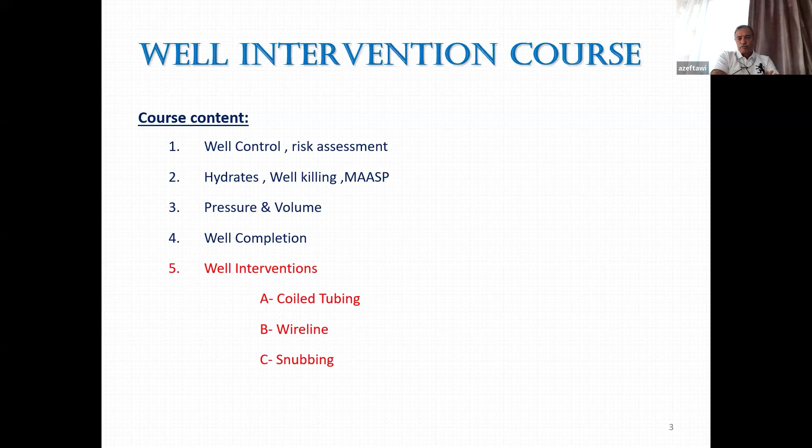If you see this picture, that's why we say, why intervention? Why the intervention is we need to avoid seeing this picture, because the impact of this picture is life loss, definitely environmental loss,

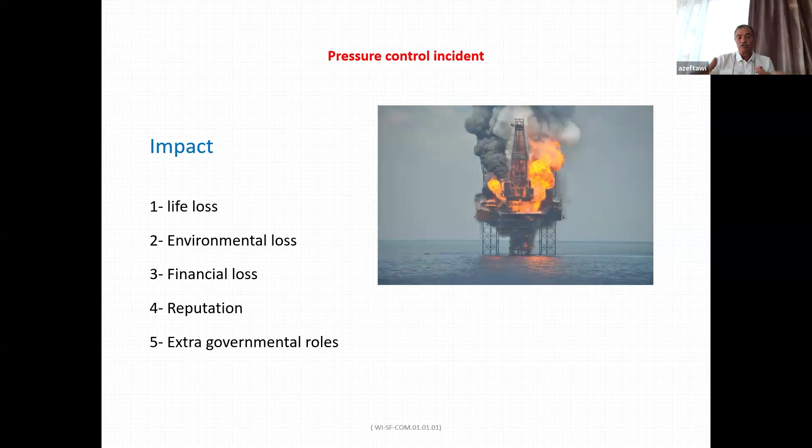financial loss, reputation. And number five, we call it extra governmental regulation, which means that whenever something wrong happens, we start putting new rules. To a limit that these days I cannot take a bottle of water with me to the plane. To go to the airport, sometimes I go 4 hours before the plane, and I have to pass by maybe 5, 6, 10 checkpoints before I reach there. This makes my life miserable. This is what we call extra governmental regulation.

When we go to the field, we care about what we call well integrity. What's well integrity? It is defined as per the NORSOK standard as the application of, it's a mixture of three things, as you notice: technical, operational, and organizational solution to reduce the risk of uncontrolled release of hydrocarbons. This is all what we care about.

I mean, how to deal with pressure, because hydrocarbons are deep, 10,000, 20,000, and more deep in the earth, and it comes all the way to the surface with pressure. It's very important to know how to deal with this pressure because pressure is a killer, as simple as that. Yeah.

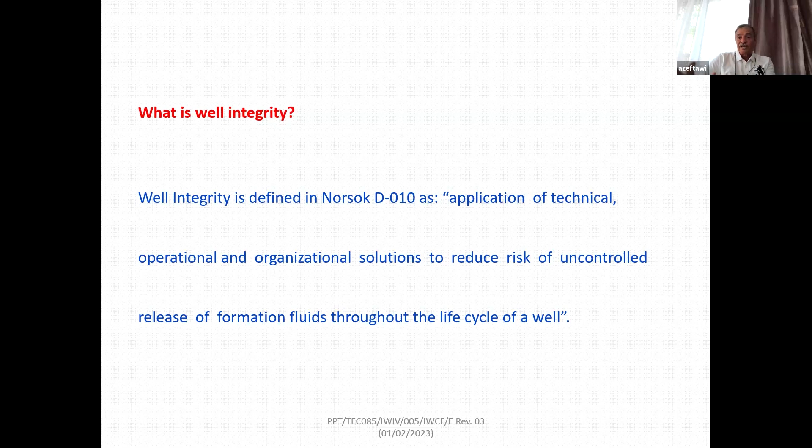And that's why when we are on rig sites, whether onshore or offshore, we do what we call simulating drills. What is drills? It is a simulation where we try to say, guys, tomorrow at 2 o'clock afternoon, we will have a problem. So tomorrow at 2 o'clock, there will be a bell that sounds in the rig site. And when you hear this bell, each one of you guys has to secure the job he is doing. Then go to the muster point.

Then tomorrow, when we come at 2 o'clock, when people hear the bell, everyone secures his job, and then goes to the muster point. Then the safety engineer will go to muster point number two. He's supposed to have 10 people. He will look at the list and he will start saying names, and then they will discover that Alex is not there. So where is Alex? Then we start searching for Alex. Then Alex, we found him in muster point number three.

Why, Alex, you went to muster point number three? He said, well, I was at the toilet, and when the bell sounded, I found that muster point number three is nearer than muster point number two. Then we tell him, please, Alex, we will have another one Tuesday at 5 o'clock afternoon. When you hear the bell, wherever you are, please go to muster point number two, which is your muster point. How to secure the job? This is a philosophy, or as per the design.

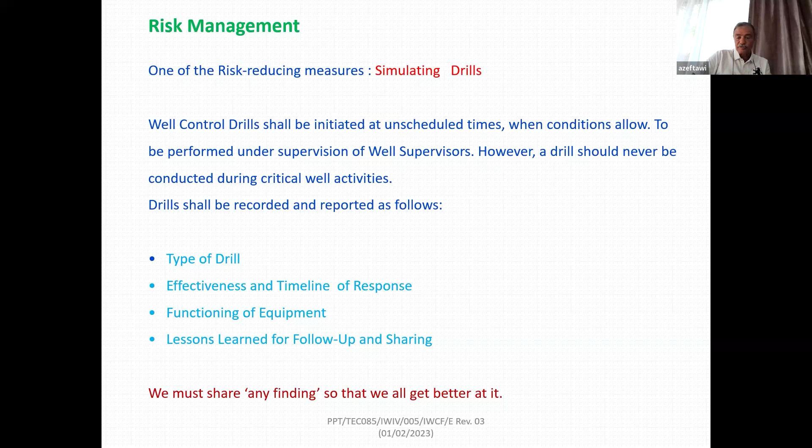To be able to answer this question, we have to understand or ask ourselves: the gas behavior from deep in the well all the way to the surface depends on whether the well is flowing or shut in. And when we talk about the gas behavior, we mean its volume and its pressure.

If the well is shut in, the gas bubbles traveling from deep in the well all the way to the surface cannot expand, cannot increase in volume, because it is a confined space. The well is shut in. So what happens is, in a shut-in well, the volume does not increase, but the pressure does. Because these gas bubbles cannot increase in volume, they travel upward with their pressure all the way to the surface, creating what we call gas cap.

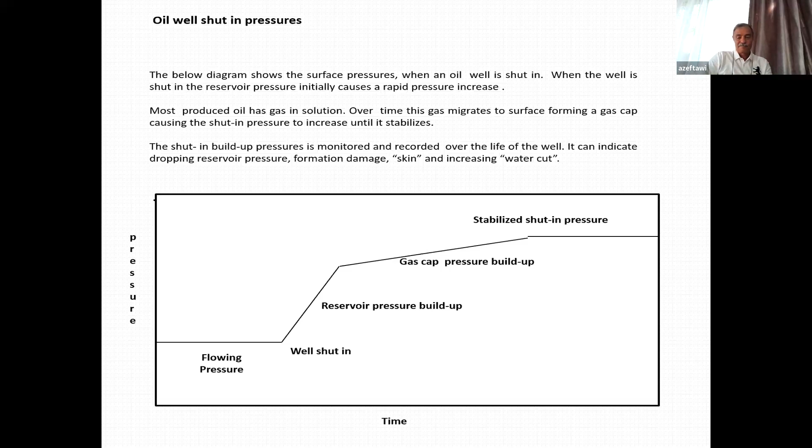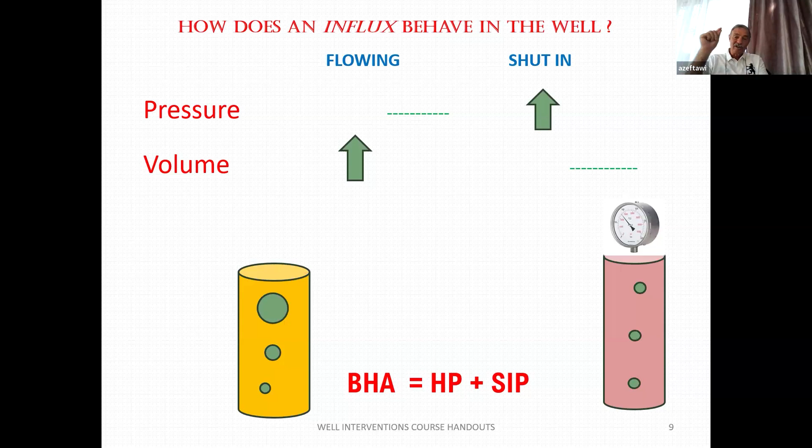I need to go back here. I just need to be sure that you understand this. In a flowing well, what's the gas behavior? Volume increases, pressure does not. The opposite if you shut in the well: volume does not increase because it's a confined space. Accordingly, the pressure increases.

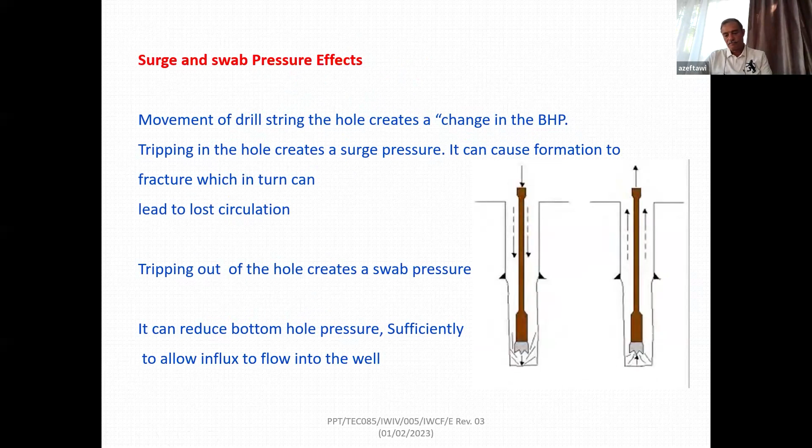One of the challenges we face in the oil field industry is what we call surge pressure and swab pressure. What is swab pressure? Swab pressure happens when you are pulling out of the hole with your tools and you don't have enough clearance between the ID of your tubing and the OD of your tools. If you don't have enough clearance, when you pull out of the hole fast, you are creating vacuum.

The same thing is the surge pressure. Surge pressure happens when you are running in the hole too fast and you don't have enough clearance between the ID of your tubing and the OD of your tools. When you do that, like injection, both injection and vacuum hurt your reservoir.

And that's why we say the word slow. The word slow in our routine life is a disadvantage, but in the oil field, this is the word you are looking for. When you run in the hole, slowly. When you pull out of the hole, slowly. When you are pressure testing, slowly and in stages. When you bleed off the pressure, slowly and in stages. Have you noticed that? Slowly is the word that attracts you to the good practice you should follow.

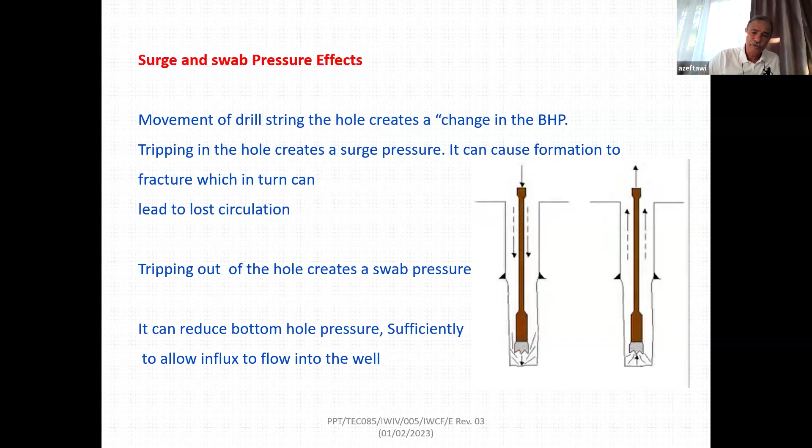Each additional single psi you add, number one, you are creating a hazard. Number two, you are creating fatigue to your equipment. That's why you have to minimize the hazard and minimize the fatigue you create to your pressure control equipment.

I know, guys, you might have so many questions to ask me, but this is the bad side of online courses, which I hate, because I'm talking most of the time, talking to the wall, I'd say. While in the practical courses, the normal courses, I'm with my attendees and we can fight all day. I like fighting a lot, in a sense of talking to each other and having different views. Then I try to convince you, and you try to convince me, and at the end we fight and go to the court, which is the API. I am missing this in online courses, that I keep talking and you keep listening. But unfortunately, this is how it goes.

Let's start with this topic, barrier. What is the barrier? What kind of well service disaster could happen caused by pressure? It is the blowout. The pressure causes a blowout.

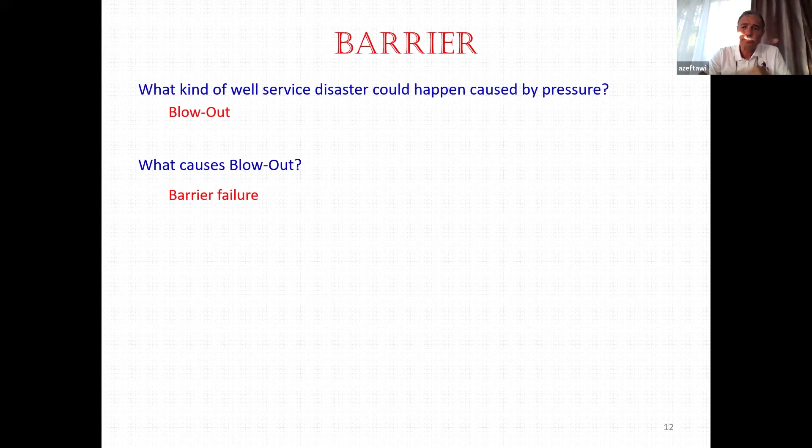What causes the blowout to happen? The barrier you are using failed to do its job. What is the barrier? By definition, it is any device, fluid, or substance that prevents the flow of a hydrocarbon.

Like what? Like the Christmas tree, like the BOP, blowout preventer, like a wireline plug we put in the completion landing nipple, like the stuffing box of the slickline, the grease injection head of the electric line or braided line, like the stripper in the coiled tubing.

Like the fluid. But when I say fluid, I cannot stop there. Fluid is considered a barrier if it creates hydrostatic head greater than formation pressure within a specific range, 200 to 300 psi, and it has to be monitored all the time. The moment you lose monitoring of this fluid, you cannot consider it as a barrier.

So for fluid to be a barrier: number one, it has to create hydrostatic head greater than formation pressure within a specific range, which we call 200 to 300 psi, and it has to be monitored all the time. Otherwise, it is not a barrier.

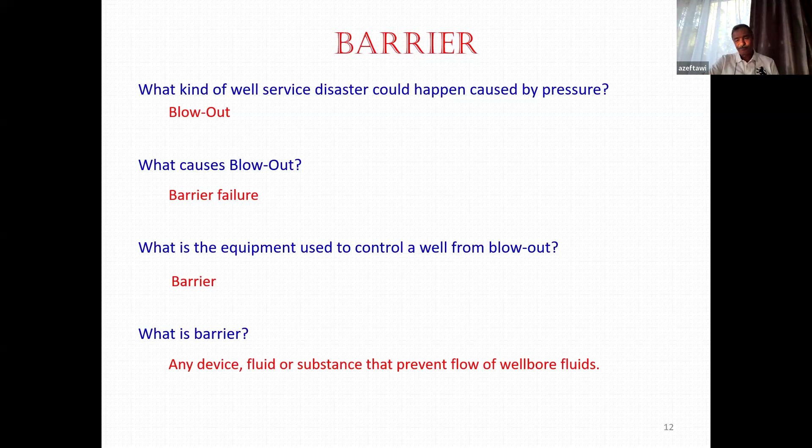We classify barriers into three categories: primary barrier, secondary barrier, and tertiary barrier. Normally, we are working using the primary barrier.

In slick line, for example, our primary barrier is the stuffing box. If it fails, we stop the operation and go to the secondary barrier. Why do we stop the operation? Because the only barrier that can work while running in and out, while in motion, is the primary barrier. All other barriers you can think of using, you have to stop the operation for. They work in static conditions, not flowing, not in motion. So if your primary fails, we stop the operation and apply our secondary barrier.

I know that one hour has gone so quickly, but let us see this question: what can happen when you unset a retrievable bridge plug and don't have enough weight above it?

The retrievable bridge plug is a wireline plug. We run it through the production tubing, go all the way down, pass the production tubing, go to the open hole. This retrievable bridge plug has a rubber element that inflates to seal around the casing.

We use it to do a certain job. Once we finish, we need to retrieve it out. Before you retrieve it, what is the first thing you should do? Equalize the pressure - keep this in mind for your future.

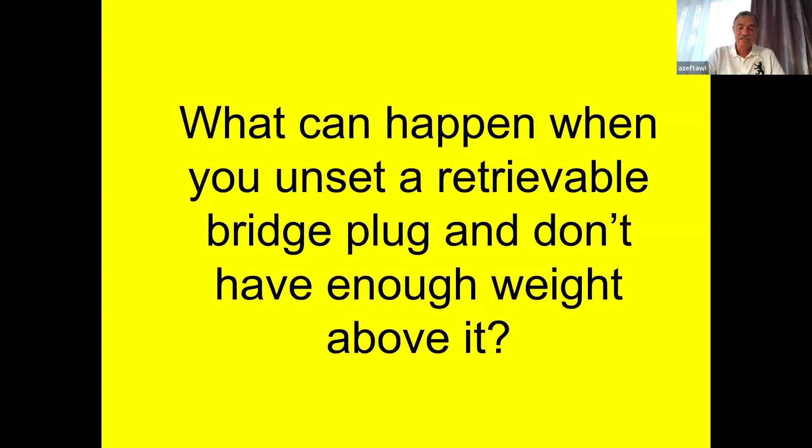You cannot open any device without equalization, without equal pressure - even the self-equalizing devices. Because even these self-equalizing devices, to open them, how do they know that you need to open them? You have to give them a certain type of pressure or movement to tell them 'I need to open it.' By doing that, you open a little port, and yes, you wait about 15 minutes for it to self-equalize. But generally speaking, you cannot open a device unless you equalize the pressure above and below. If you didn't, this is what you're going to see - these are actual pictures taken from that place.

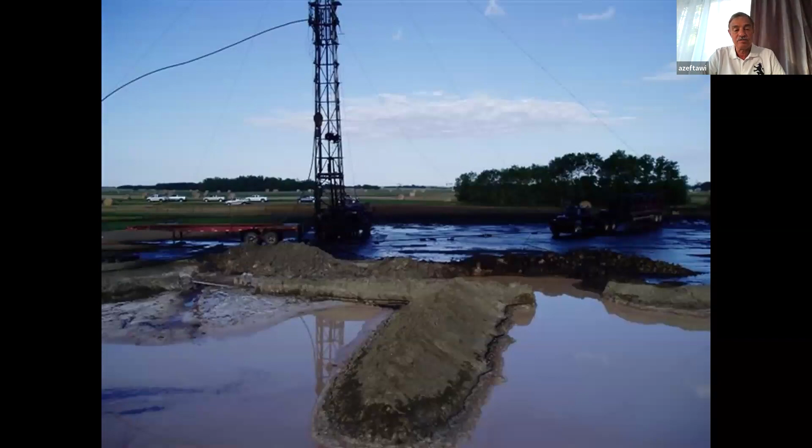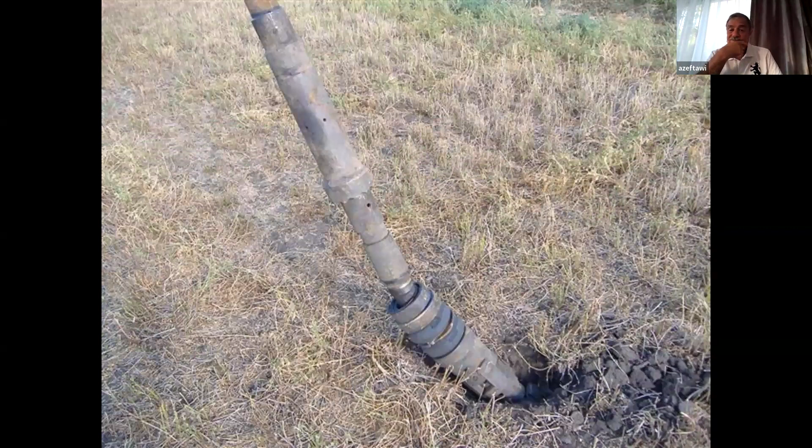And this is the retrievable bridge plug. They found it. Where did they find it? If you have a meter to measure the distance between the rig and this device, it is almost 400 meters. This was not there. This was 1,000 feet below. When you open it again, it's differential pressure. The pressure pushes it all the way to the surface, and it flies like a rocket 400 meters away.

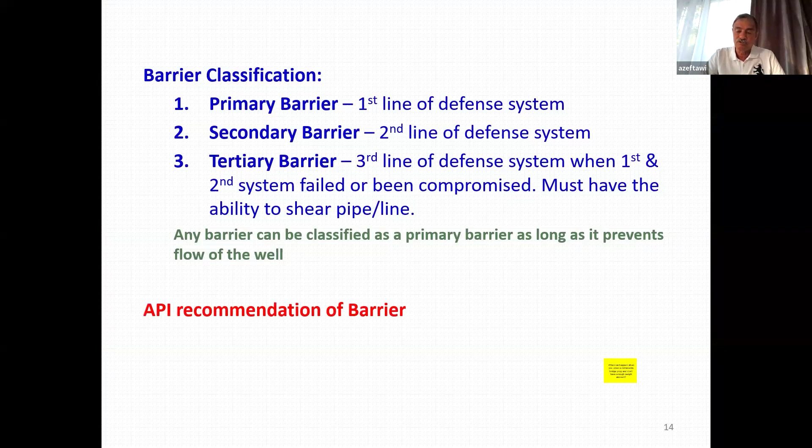This bridge plug, as a classification, actually, it's a barrier. But if you misuse it, it will create a disaster. If you misuse the barrier, you will have a disaster. The API said that the minimum number of barriers you should use is 2, regardless of the type of operation you are doing: workover, drilling, coil tubing, wireline, snubbing, whatever it is. The minimum number of barriers is 2.

That's why we at the well intervention team, when we work with coil tubing or wireline, we use 3 barriers. Why do we use 3? Because if during the job we lost 1, we're still under the umbrella of the API. We have 2. But if we use the minimum, which is 2, and during the job you lost 1, you are in deep trouble now. That's why we use at least 3 in well intervention.

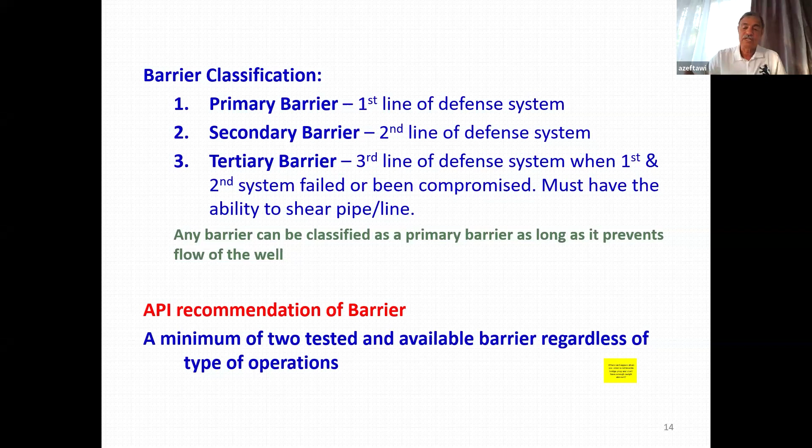If you don't mind, I need to finish this topic, so I'll go further a little. Anyone who wants to leave, feel free to do that.

We classify the barrier into 3 categories, but now we are talking about the barrier types. We have 2 types of barrier. We have a mechanical barrier and we have a hydrostatic barrier. Even the mechanical barrier, we have 2 types of these. We have either closed type or closable type. In closed type, it is closed throughout the operation, like the wireline plug, like the stuffing box of the wireline, like the stripper of the coil. As long as you run in the hole or pull out of the hole, it is closed.

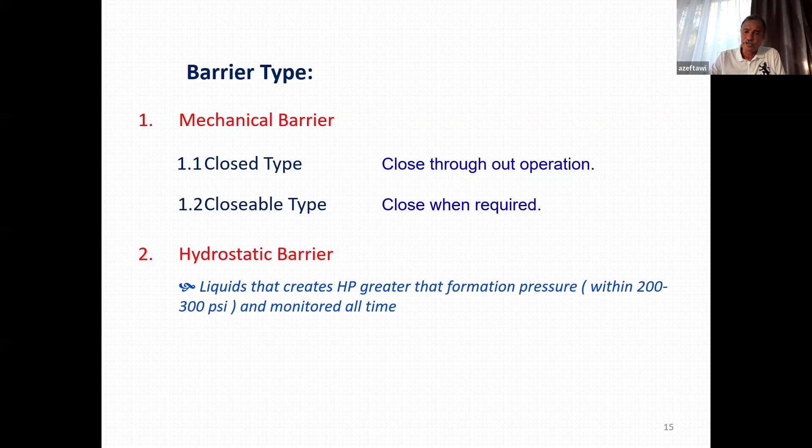This is closed type. But in closable type, it is closed when required, which means it is open by default. It will close when you need it, like in BOP, like in Christmas tree. These are closable type. The hydrostatic barrier, we agreed, is a liquid that creates hydrostatic head greater than formation pressure and monitored all the time. Otherwise, it is not a barrier.

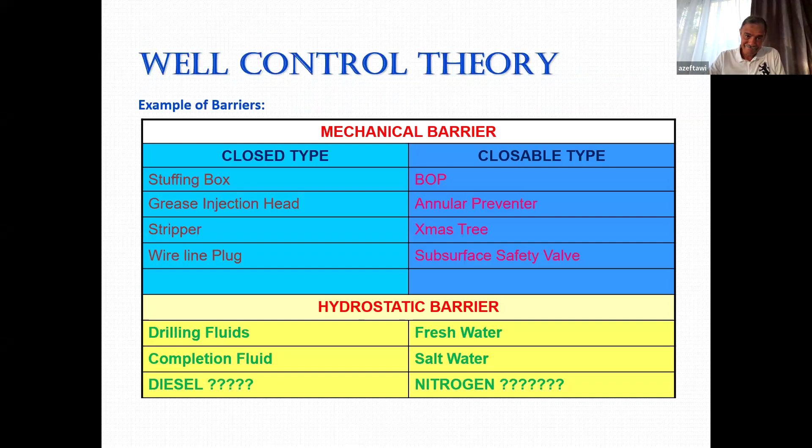When we test a barrier, this is a rule with no exception. You cannot use a barrier without testing. It is a must that you test a barrier before you use it. And when you test it, we need to test it from the direction of flow. It is not from below, not from above, not from the side. It is from the direction of flow.

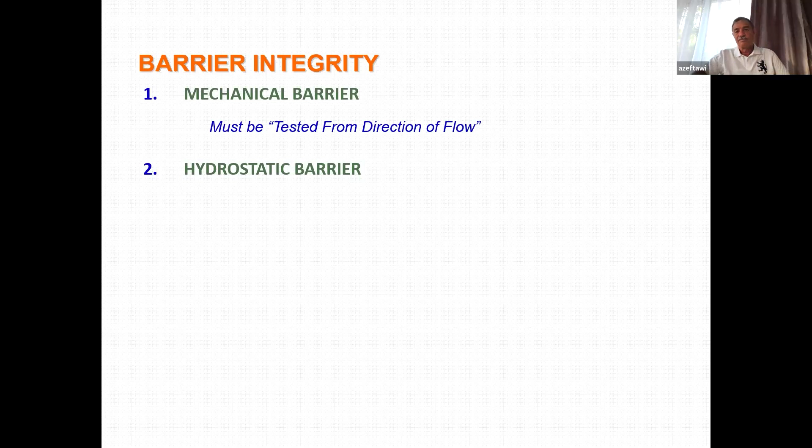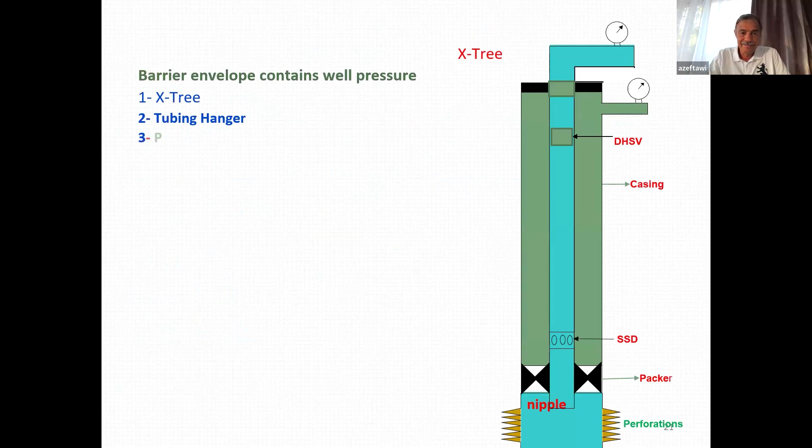You cannot have a BOP blind ram, close it, and test it from above. By the way, it will resist, but you damage it, because it is designed, when you close it, to withstand the flow coming from this direction. So you have to test it from this direction. We test it from the direction of flow. I will skip this because time is limited.

But the general rule of testing the barrier: we test it from the direction of flow. We never test with gas or flammable liquid. This is common sense. Be sure there is no air in the system. You have to get rid of the air because the air will mislead you from the correct pressure gauge reading. Do not exceed the maximum working pressure. All tests have to be recorded. Use standards and procedures.